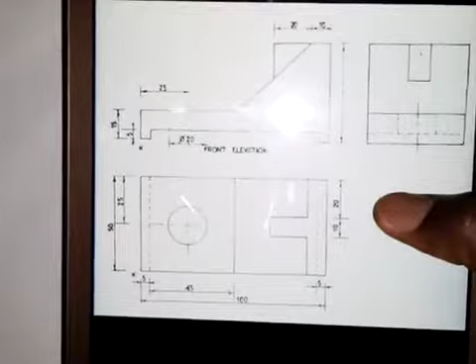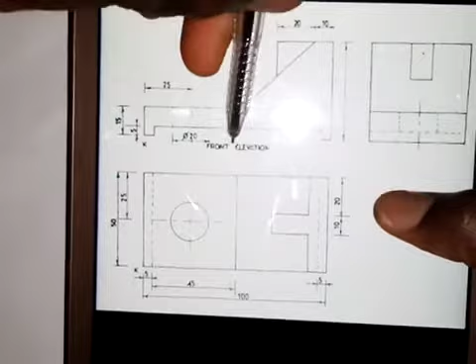Right now, this is the work that I want to do. These are orthographic views of an object, and we are going to make an isometric view of this object by putting these parts together. These views are given in first angle orthographic projection. This is the front elevation as indicated here, this is the plan, and this is the end elevation.

This question happens to be a WAEC question in which candidates of that year were asked to produce the isometric view of the object by freehand sketching. But now I want to use the instrument to produce the isometric view of this.

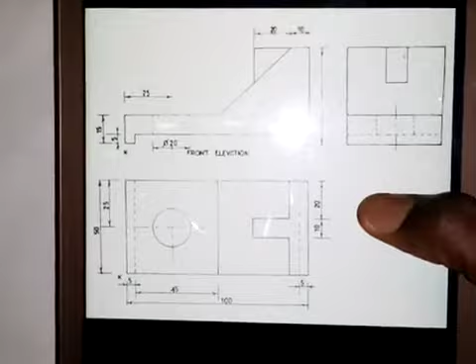So as you can see, the dimensions are all there. The distance from here to here is 100 millimeters, from here to here is 5, from here to here is 10, from here to here is 20, and so on. You can look at the views to see the dimensions.

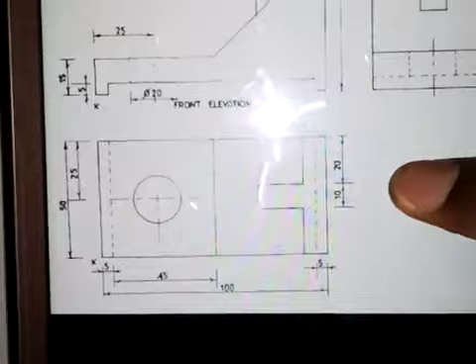So for us to produce the isometric view of this, they said this point here is the lowest point. I've explained this several times.

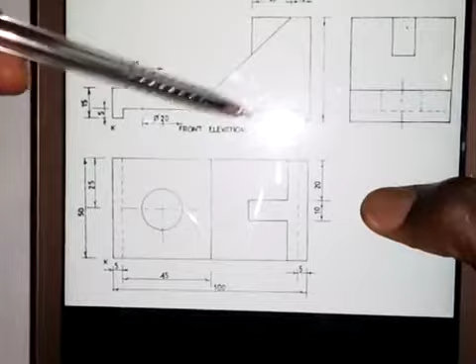What I want to do first is bring out this face first — this surface that we have here. That's the first thing I want to do. I'll bring this in once in a while to show you the next thing. But first, I want to bring out this shape of the front elevation except this part.

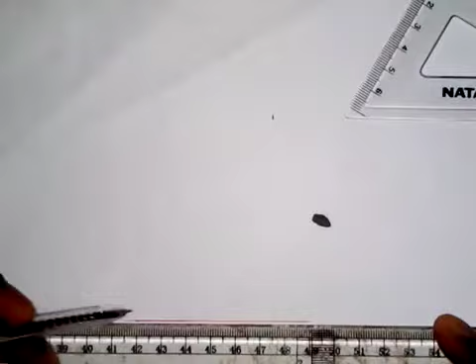The first thing you need to do is draw a horizontal line. So you draw a horizontal line here like this. From here, you draw this line in this direction, and then you take this, so this goes in this direction.

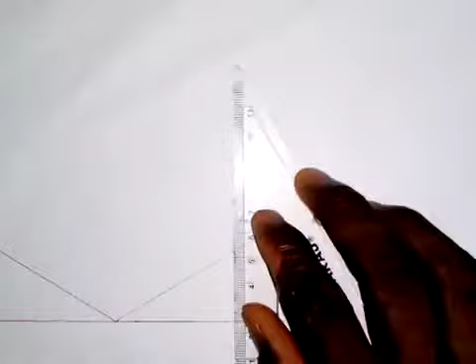The next thing we are going to do is draw a short vertical line at this point like this. Now let me bring the views.

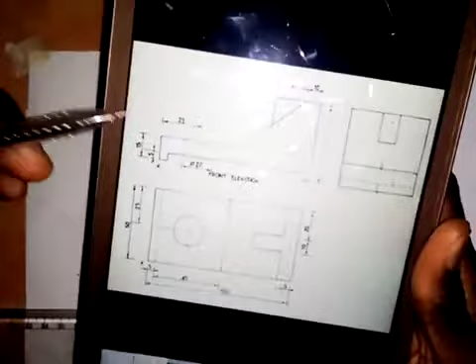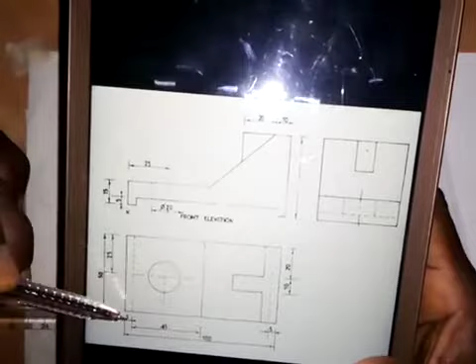As I said, we are going to produce the shape of the front elevation. Distance from this point to this point is 100 millimeters as shown here, and distance from here to here is 5, from here to here is also 5. Distance from this point to this point is shown in the plan as 45 millimeters. I'm going to put all this together, and distance from here to here I can't see in the front elevation, but I will assume it is 50 millimeters.

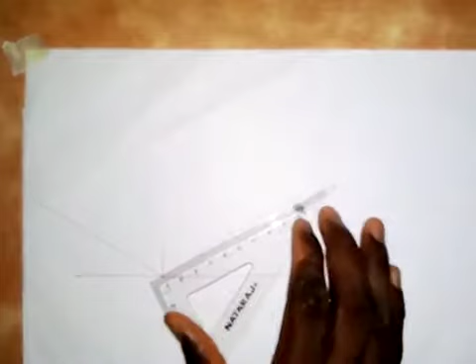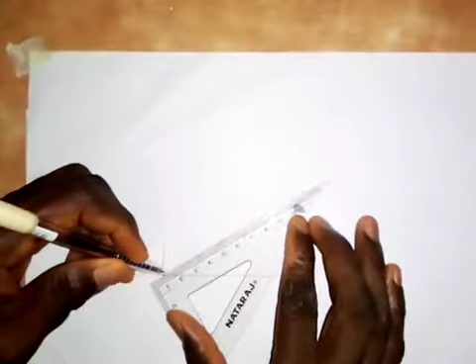With this distance I'm looking at, it should be 50, so I'm going to take 50 millimeters. First, I will take 100 millimeters. So from here, this is 100 millimeters. Then I will take 5 millimeters, and another 5 millimeters from the back here — this is 5 millimeters. At this point, I will draw a short line like this.

At this point I will draw a vertical line like this, and I will take 50 millimeters here. Okay, maybe I will make it 40 millimeters — let me make it 40. I'm looking at the size of the paper, so I will take 40 millimeters there.

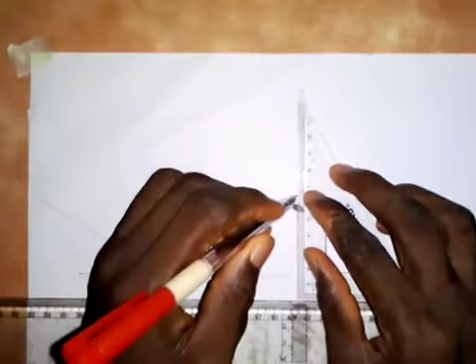At this point, I will also draw a vertical line here, this short vertical line. Let me bring in the front elevation for us to see the part. Distance from here to here is also 5 millimeters, from here to here is 5 millimeters. So I will take a measurement of 5 millimeters here, from this point.

Now we'll draw a line with my 30-degree set square. I will draw this line, it goes in this direction like this. Then at this point there will be a line that goes inward like this. Let's do that at once.

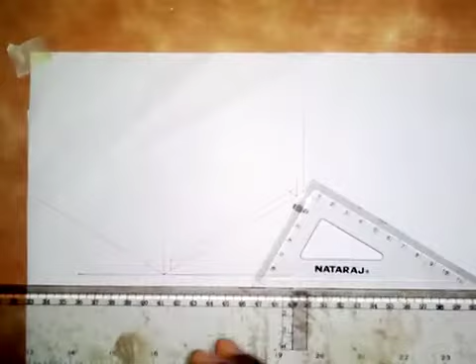The next thing I'm going to do is find the height from here to here. This is 15 millimeters, so I'll take a measurement of 15 millimeters. From here, I'll take 15 millimeters up — this is 15 millimeters. So here I will draw this line.

So this line will go in this direction like this. Along this line I will take a measurement of 45 millimeters. This is 45 millimeters here.

So at this point I'm going to draw this line like this. I need to take some measurement here, so let's look at it. We have that distance from here to here is 10. From here to here is 10. So I only need this 10 for now, this 10 millimeters from here, I only need it for now.

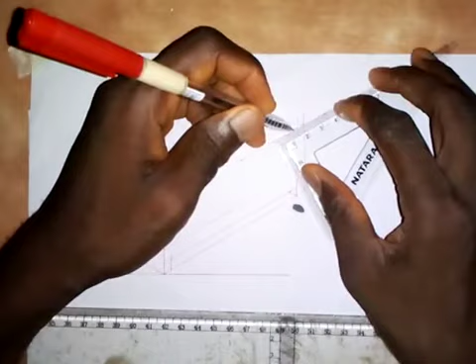So then we have gotten this point, which is 45 millimeters from here to here. So I will take a measurement of 10 millimeters here. So this is 10 millimeters here. So this 10 millimeters, I'm going to connect it to this point like this.

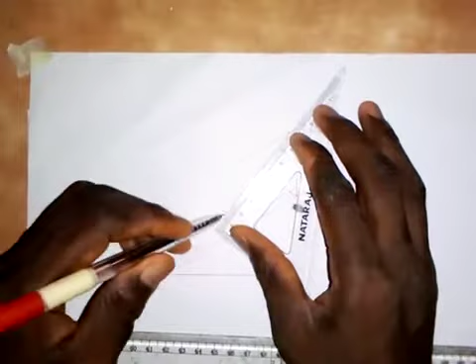So if you look at what we have here, the front elevation has come out. So this is it, from here to here, the front elevation has come out.

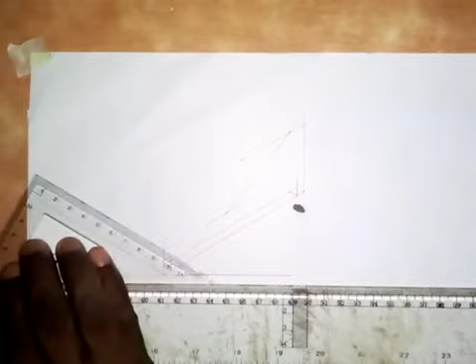So the next thing that I'm going to do here, for us to bring out the shape, the next thing I'm going to do is to transfer. So I will transfer this to this side. Here I will transfer this point, transfer it to this side.

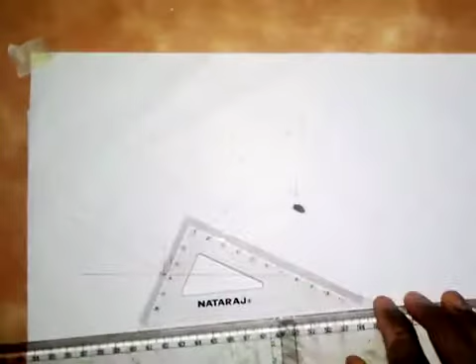Then I will also transfer this point to this side. Then this point also I will transfer it to this side. Okay, so look at what we are doing here, it is very simple, very simple.

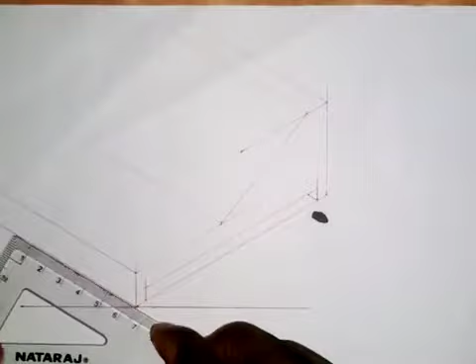So the next thing I'm going to do here is to take the width of the object in the plan. So we have that distance from here to here is 50 millimeters. So that 50 millimeters, I will take it right now. So all I need to do is to come here, so is here, 50 millimeters. This is 50 millimeters here.

So here I will draw a line from here, a vertical line here like this. I believe you can see this vertical line.

Then I will transfer this point with my 30-degree set square, I'll transfer it here like this. So that same 50 millimeters, I need to take it here. So this same 50 millimeters, I'll take it here like this. So with my set square, I will transfer this point here.

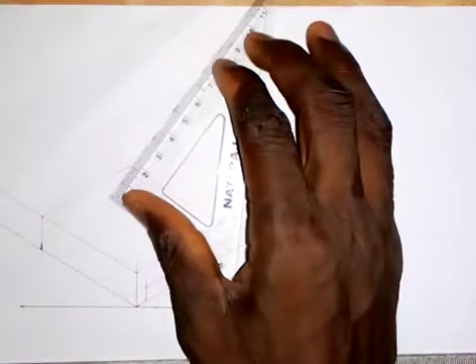Then I will join this together. So this kind of line, as I've said before, is known as non-isometric line. When a line is like this on an isometric object, we call it non-isometric line.

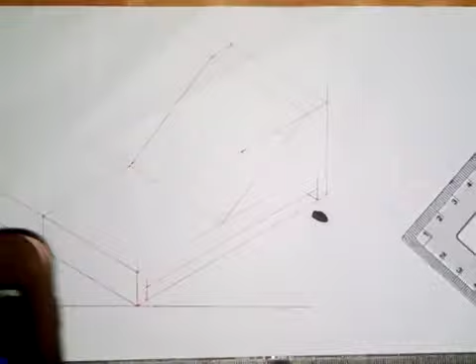So with what I've done here, I've drawn most part of the diagram. So the next thing that I'm going to put here is this web that we have here, which is in the middle. If you look at it in the end elevation, it is in the middle, and also in the plan it is in the middle. So we need to place it here.

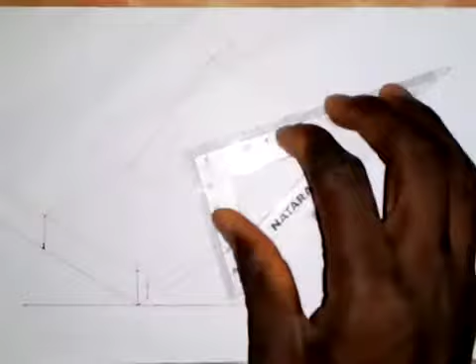So let's get the midpoint of this. So the midpoint is, coming here, I will divide 50 by 2, that is 25 millimeters. So this is 25 millimeters.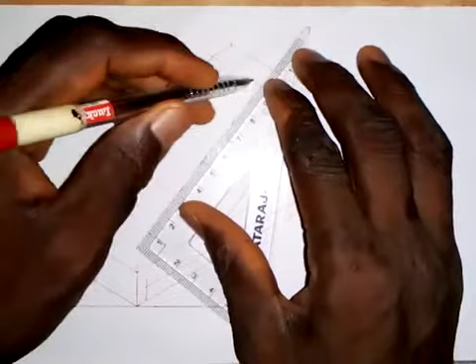So let me come here also, I will also take it down here. So this is 25 millimeters. So I'll just join this together partially with short dashes line like this.

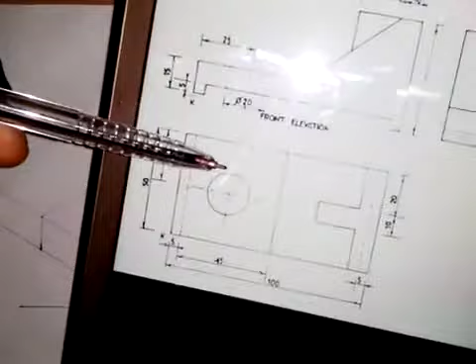Okay, so with what I've done here, for the web, I need the thickness of the web. As seen in the question, the thickness of the web is not shown, but I will take it as 10 millimeters, and the length from here to here is 20 millimeters. I think from here to here will also be 20 millimeters. So that's what I'm going to use.

So first of all, I will take coming here from this point, 5 millimeters. This is 5 millimeters and this is 5 millimeters, making 10. So I will use my set square.

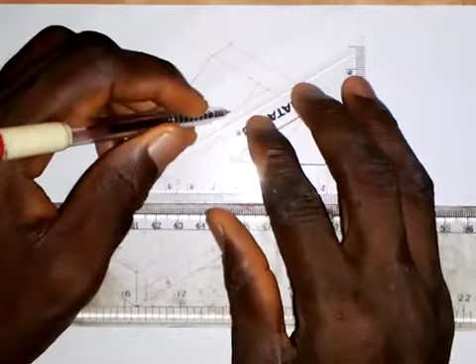So I will draw a line in this direction, it goes like this, and I will also draw this line in this direction like this. Then I'm going to take a measurement of 20 millimeters from here. So this is 20 millimeters.

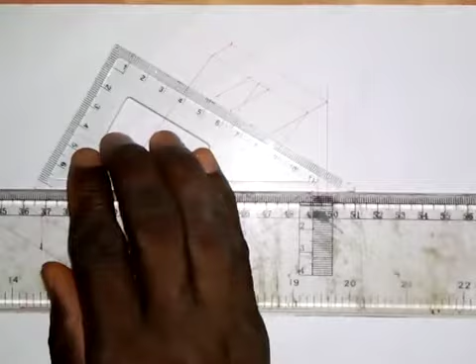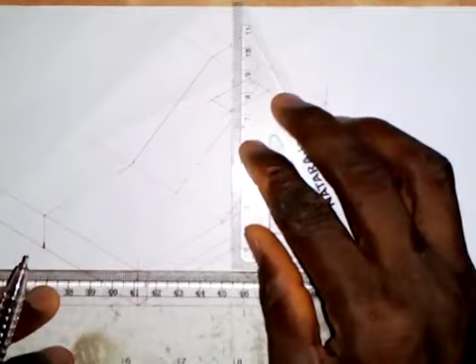So this 20 millimeters, I will transfer it to the other side. So from this point now, I will draw a vertical line. Wherever it stops on this surface, that is where I'm going to stop it. So I will draw a vertical line here, and here also I will draw a vertical line like this.

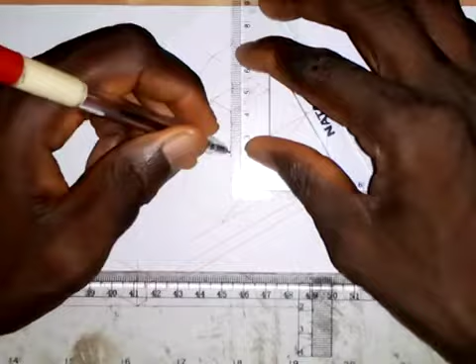Okay, so with these vertical lines that I've drawn, let me see. I'll take a measurement of 20, this is 20 millimeters here. So this 20, I'll transfer it to the other side. Then I will join this together like this.

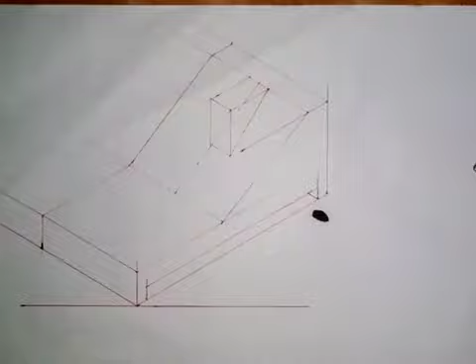Alright, so that is how the web will look. So the next part of the object is the circle that we have here.

The diameter here is 20 millimeters, and from this point to the center of the circle is 25 millimeters.

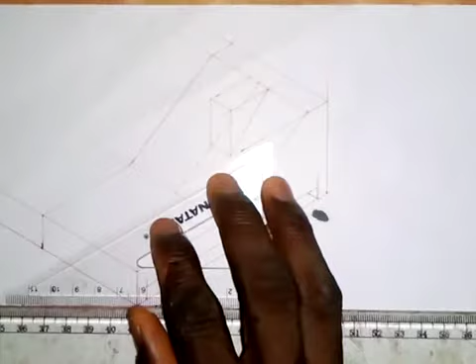First, I'm going to take this center line I've drawn and bring it forward here like this. Then I will take a measurement of 25 millimeters.

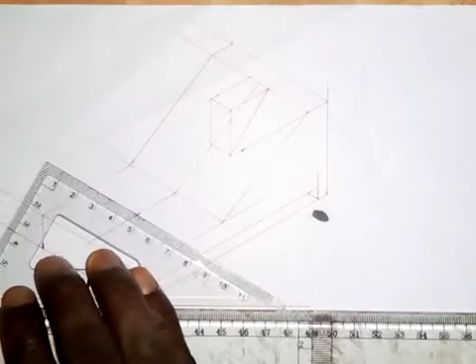So we draw a center line here. This is the center line.

From this center, I will take 10 millimeters to the left side, 10 millimeters to the right side. Then on this side also, 10 millimeters to this side and 10 millimeters to here, forming a square.

With my 30-degree set square, I'll draw this line, and here also I will draw this line. Then I will draw this line, and here also this line.

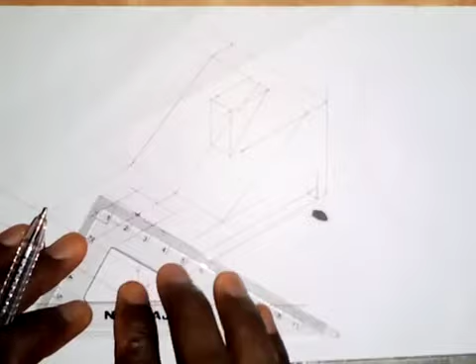Okay, I'm looking at this. Is this up to 10 millimeters? It is not up to - you can see it's not up to 10 millimeters. Thank God I saw it before I began to draw the circle, because that would have been an error.

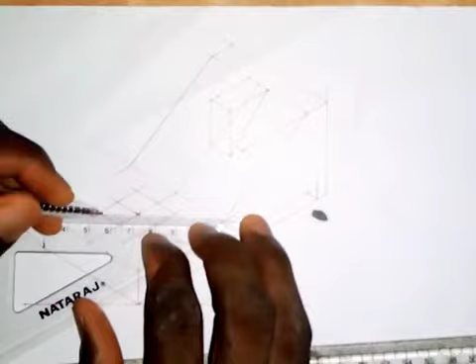Okay, with what I've done here, as you can see, we know how to draw an isometric circle. So join this together - we are connecting this point together with this, using the four center method, as you know.

So we connect this together, and we are connecting this point together with this point here, and we also connect this point. Then we also connect this point with this point here. So we have gotten the 4 points.

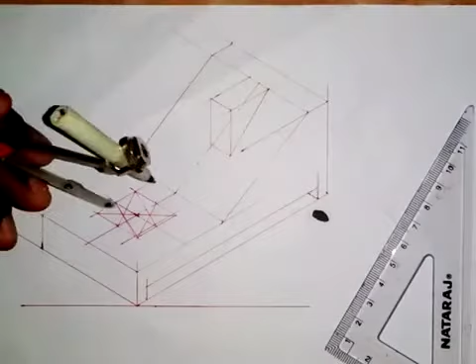The next thing I'm going to do is put the pinpoint of my compass here, and now we extend it to this point here.

If you are watching my video for the first time and you don't know how to draw an isometric circle, I've made several videos on that - go and watch it.

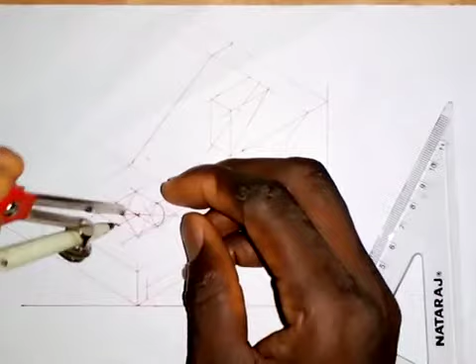So then I'll put it here so it touches this point, and I'll draw this to this. Okay, then I need to draw this from here, so it goes like this. Okay, so I'll put it here.

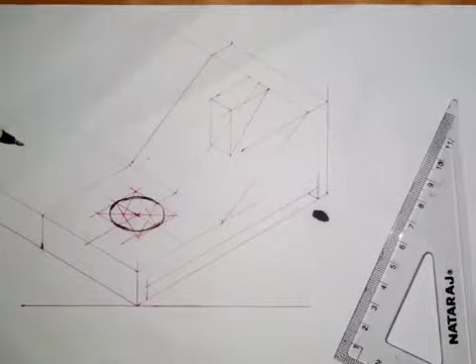With what we have done here, the thickness is just 10 millimeters, so we should be able to see the down part of the hole. So we are going to do that.

What I usually do is from a point on this curve here, draw a vertical line down here like this, and come to this point, draw a vertical line.

So the thickness from here to here, we have taken 5 out of 15. The thickness from here to here is 10 - take a measurement of 10 millimeters from this center here, take 10 millimeters down. So this is 10 millimeters here.

And then if I take 10 millimeters here, that is not enough - it will not give me 10 millimeters, so I will only make use of this one. What I usually do in this case is use my hand to produce it like this.

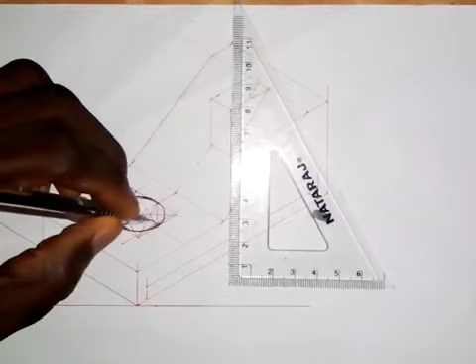So for us to show that we can see the down part of the hole, that is the purpose of doing this. You can see the down part of the hole - I believe it is well shown.

The next thing we are going to do here is bring out the shape that we have produced. I need to draw this line as a thick line - I need to make this a thick line.

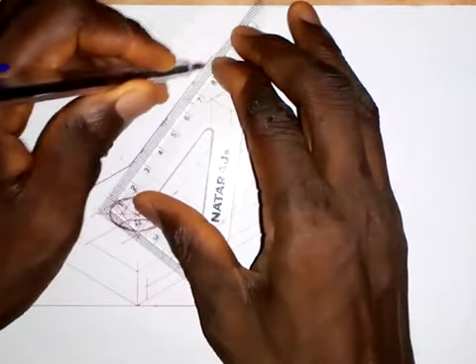So what I'm going to do is pause the video while I do this, and when I'm done, you'll see how it looks. Alright, so this is the object - we have done it.

So then this is the lowest point K, we have to put it there. The lowest point K. Every other part is there - it's as simple as I've shown it here.

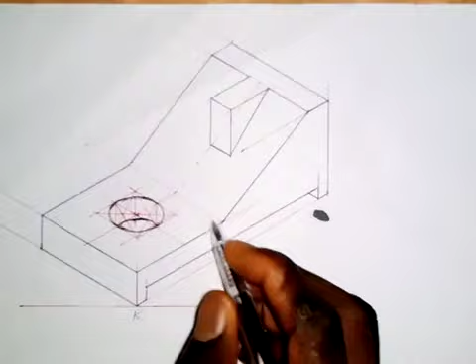All you need to do is practice it, and then there won't be any line here - there won't be any line here, that's why I left it just like that. So all you need to do is practice.